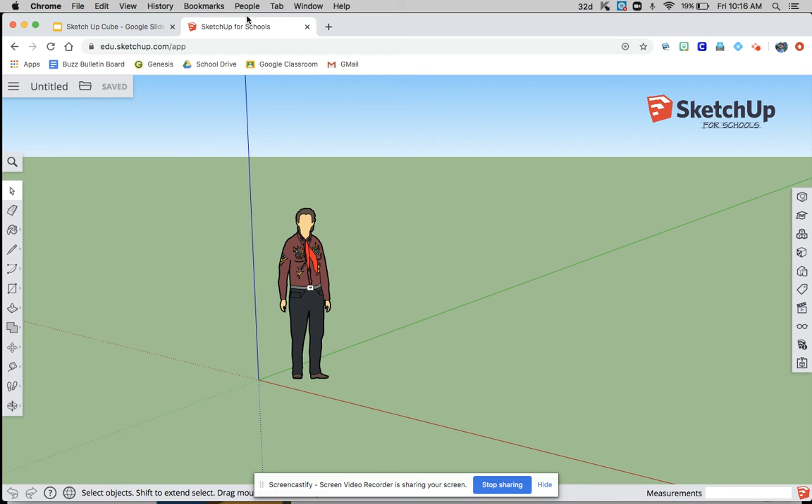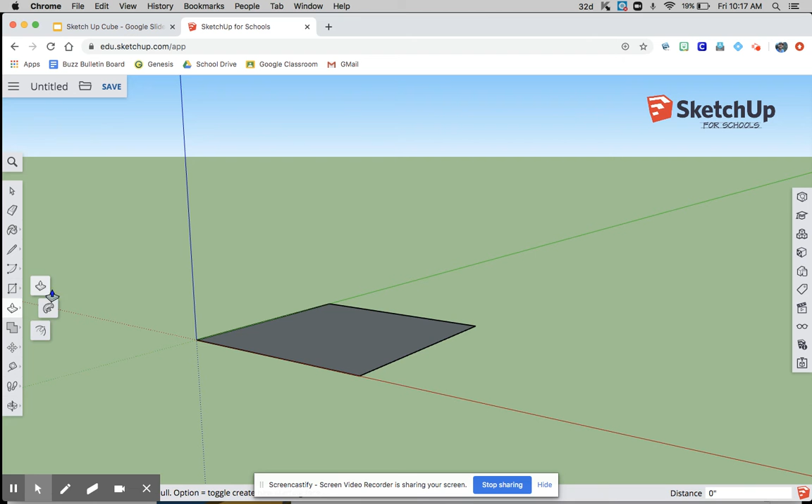First thing, it says create a rectangle that is 3 by 3. Delete the person. So rectangle tool, catch that origin, and write 3 comma 3, and then zoom in on it. Since it's a cube, I'm assuming you then use push pull to give it a height of 3. So push pull right there, click, go up 3, enter. Now we have a cube.

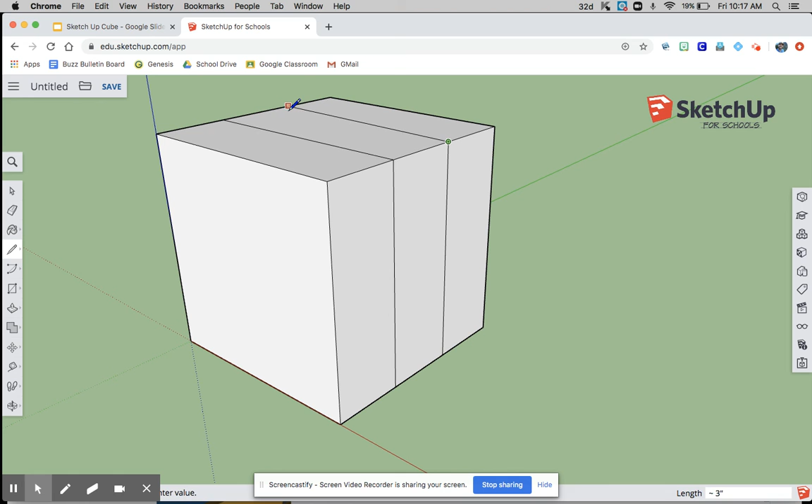All right, break each face of the cube into 1 by 1 squares. So if it's 3 by 3, you want to break it into 1 by 1 squares. What I'd recommend doing is going to this point and measuring. Write 1, enter, going this way. Now follow the colored line down, follow the colored line across. The remaining piece would then be 2 inches, so find the midpoint of that, since that breaks it into 1 and 1, and follow the colored lines. Good, and do that going this way.

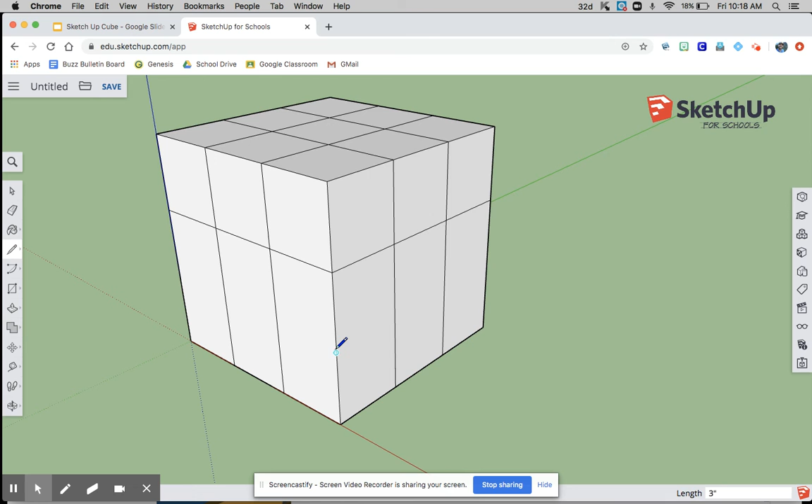So write 1, enter with your pencil tool. Click colored line, which would be green now. Click colored line, which is blue. Now this is broken in half, so down and over. That green is really light. Then same thing down, and then you're done. 1, enter. This part is a bit of a tedious assignment, but if you're okay with the little nuances of SketchUp, then you can get through this pretty quickly.

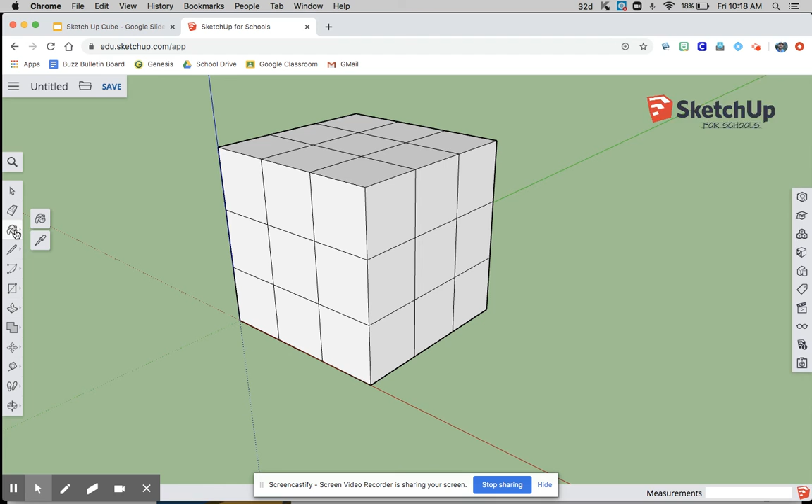Okay, so we just did that. That's awesome. Next thing is color it. You want it to have this exact color pattern, but not using the same colors. So I'm going to make this L first, that orange L, but I'm not going to make it orange. With the paint can, now we get this stuff. I'd recommend, something I've said in previous classes, like what I'd call Easter colors, or pastelly spring colors, work really nice for this. You don't want to use too dark of colors like black; it looks better later in the assignment if you use lighter colors.

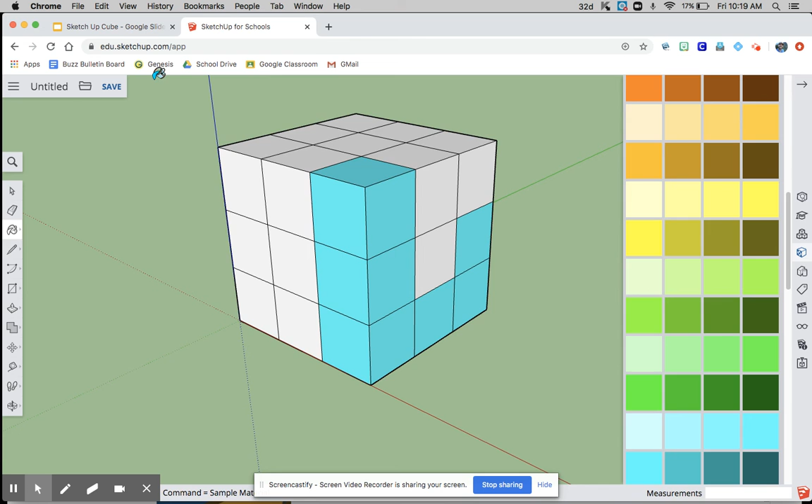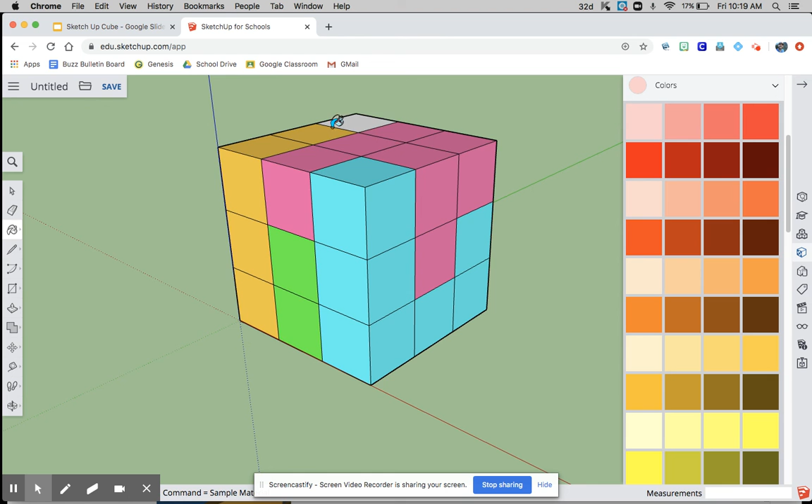All right, so then we have this little 2. That one's an easy one. I'll use this pink, I think this takes up a decent amount. I'm sort of guessing here. I think that's what it's supposed to look like. And good, I'm correct. And then we just have the back little area, which I'll do orange. Okay, so this is what we're at so far. I can get rid of the paint can in general. Okay cool, so we are here.

It's the same thing, but different colors. Some people might ask, what do I do about the back and the bottom? Because they're blank, you don't have to even really worry about them, because when you screenshot it, I'm only going to see this. So I don't really want you to work on the back, because we're going to work smarter, not harder. This is sort of a tedious part. Once you get the hang of it, it's not impossible.

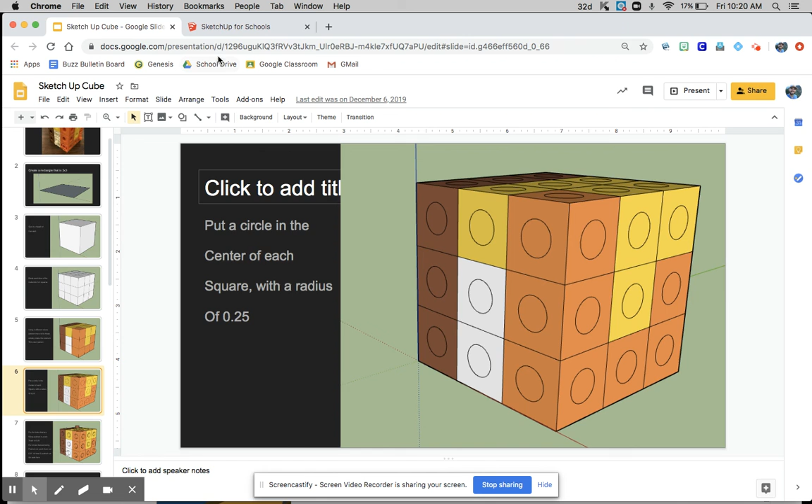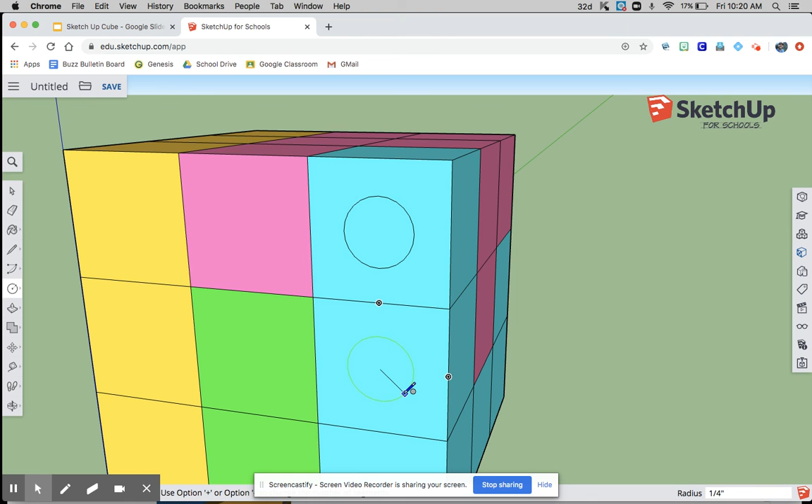You want to put a circle with a radius of 0.25 on every face. The unfortunate thing is you're gonna have to make 27 circles, but if you do it quickly it'll go fast. You find a midpoint here, that'll lock onto the middle, 0.25. And I believe if you do it the right way, yeah see, it'll naturally calibrate and catch from a previous measurement. As long as, see how it naturally will just catch there, so you don't have to do all the midpoints. And now I go from that direction, and it should be catching now, so you can do it quickly. It is a bit tedious, but it should only take you at most 5 minutes to get all the dots in.

So there's only 30 seconds left for this video. I'm going to just naturally fill in the rest of the dots, so you don't have to watch me make 27 circles. And then starting next video, we will be moving on to the next part of this. All right.